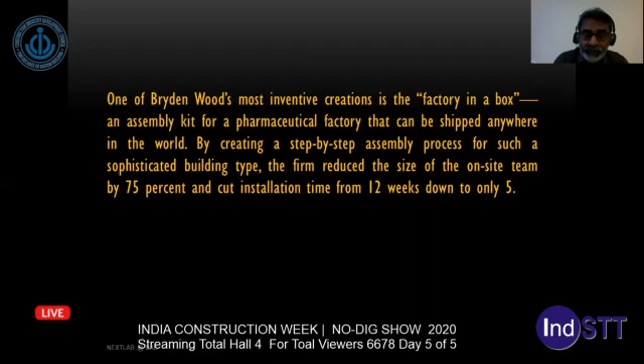Bryden Wood, one of UK's famous architects, created an inventive factory in a box, an assembly kit for a complex pharmaceutical factory, by creating a step-by-step assembly process. The firm reduced the size of the labor at the site by about 75% and the time consumed for construction by about 50%. So what we're trying to say is every company today has to think like a technology company and then look at the different verticals it seeks to disrupt.

So what is an intelligent building system, and how can we apply that to a practical real case? This is what NEXTlab @ BAE explores in this particular presentation.

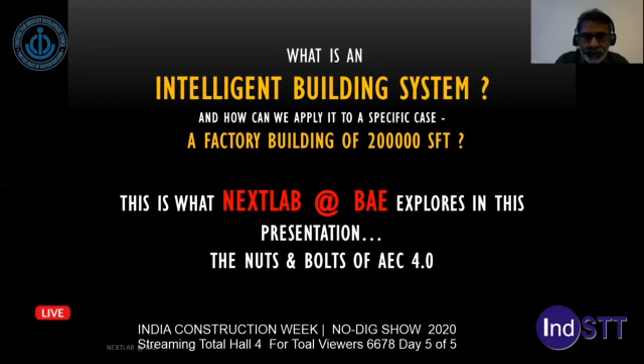An intelligent building system, by definition, is one that helps construction companies save resources, increase productivity, and improve project profitability and quality, while reducing project duration and cost, reducing the complexity of project management, and enhancing overall site safety for promoting sustainable development.

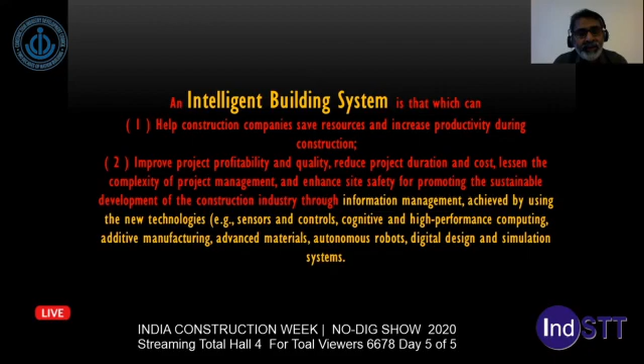NEXTlab @ BAE looks at IBS, or Intelligent Building System, from a multi-pronged perspective. The first is to create a strategic view based on a forecast of digital-driven value chain transformation or disruption.

The second is an operational view, as to how to decompose the strategic view into a pattern that can be applied across verticals. A technology view, in which case we assess the different technologies that are available.

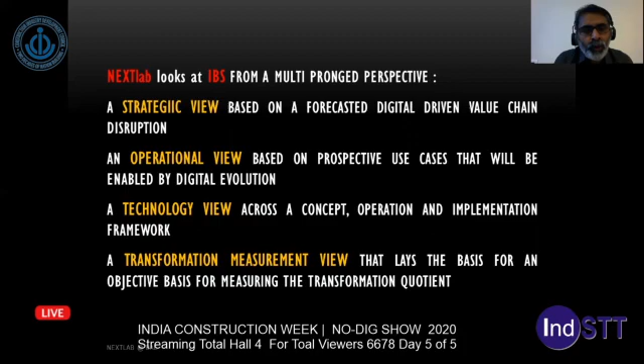The frameworks of technology and networking make it possible for us to convert the operational view, through the technology, into an intelligent building system, and a transformation measurement view that lays the objective basis for measuring the transformation quotient. Let's see the different views.

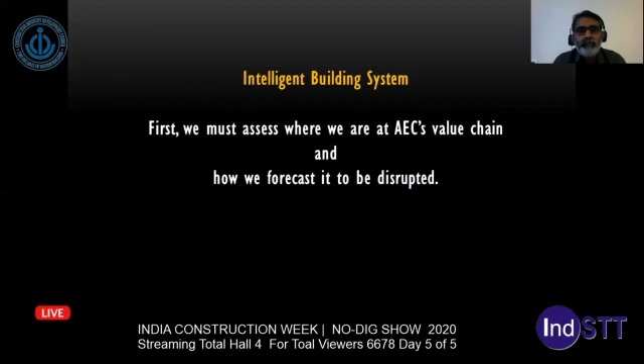First, we take a look at the strategic view. Let's take a look at the value chain of a conventional or an evolved value chain pattern in our industry.

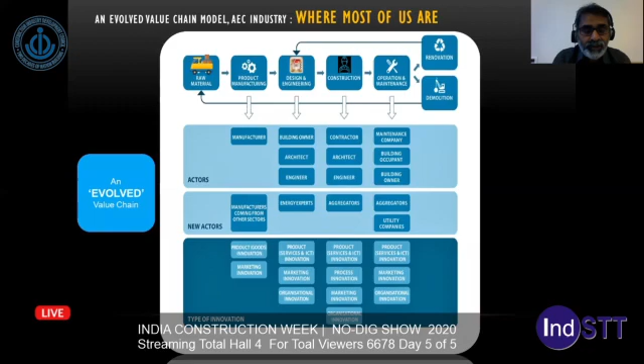From the raw materials to renovation to demolition, back to raw materials across manufacturing, design, engineering, construction, and operations, there are several stakeholders currently, with new stakeholders coming into the mix through different types of innovation. So this is how an evolved value chain currently, as most of us know it, exists.

Now, each link in this value chain that you've seen is set to undergo drastic reformation based on the digital disruptions. Let's take a look at the raw materials, the basic building blocks.

From conventional cement, sand, aggregate, reinforcement, bricks, blocks, etc., it goes through industrialization to become prefabricated RCC components like columns, beams, etc., prefabricated homes, bath pods, pre-engineered building systems, factory in a box, which you've already seen. Thereafter, through industrialization, Industry 4.0, or digitalization, it becomes converted to smart construction objects and intelligent building systems, and reformed materials or innovative materials like 3D printing solutions.

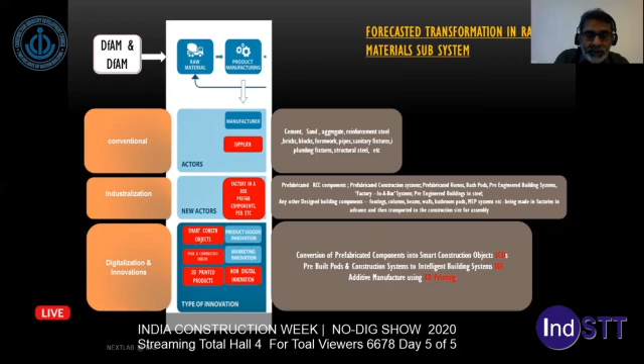So this is how the raw materials link in the value chain has transformed, or will be transforming, due to the digital disruption. With almost all the verticals getting consumed by Industry 4.0 or the digital revolution, sooner or later, this is where we are headed.

The value chain transformation in our industry would look something like this, where you can see the areas highlighted in red are the different technologies that are going to disrupt the different links in the value chain.

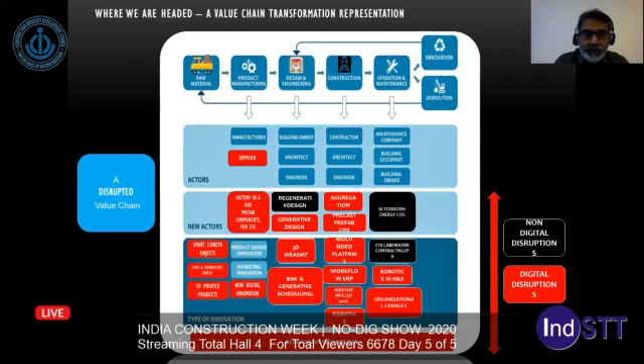And therefore, we are in the near future headed to AEC 4.0 location like this, where we have prefabrication, modular construction that will be rampant, advanced building materials, 3D printing, additive manufacturing, autonomous construction, augmented and virtual reality, big data, predictive analytics, wireless monitoring, cloud and real-time collaboration, 3D scanning and photogrammetry, and building information modeling.

So these are some of the technologies which will drive the use cases for the digital transformation of Industry 4.0 in our industry.

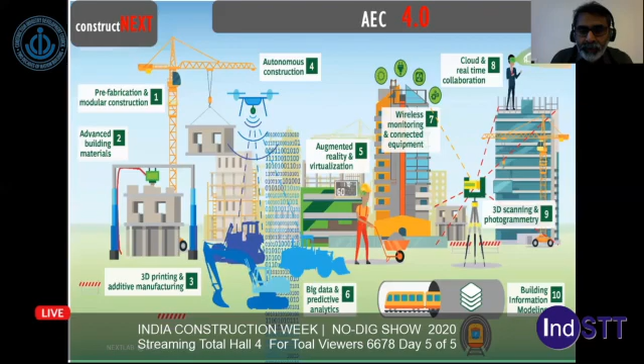So everything that you saw in the previous slide is a thing as defined in the Internet of Things. Let's take a look at the operational view based on a forecasted suite of use cases.

IBS is a product of an end-to-end digital transformation initiative across a company's or an industry's standard operating process. A company often asks the question: what needs to be, or can be, digitally transformed?

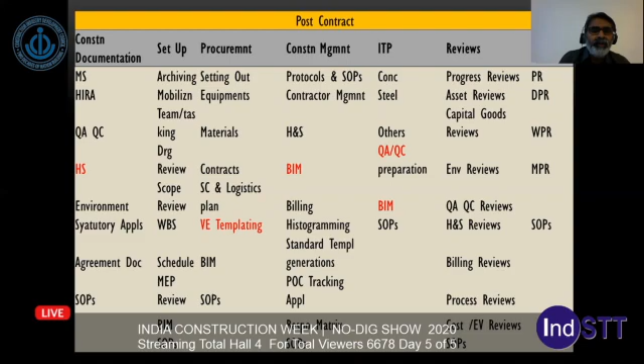For example, a suite of activities in a typical post-contract repository would look like this, across construction documentation or setup, procurement, construction management, inspection test plan, reviews, reports, etc. These have got several activities or tasks associated in a post-contract ecosystem.

Now the IPS's operating view examines a suite of activities, which we've shown before, and identifies an aligned suite of technology and other solutions to aid the transformation of each activity or operation and establish a collective automated operational protocol for it. That is the operating view.

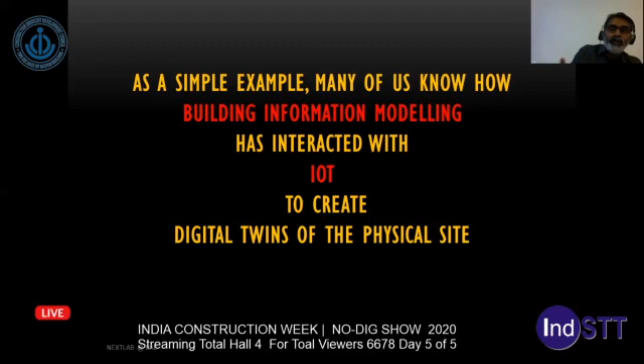As a simple example, let's take a look at the combination of building information modeling and IoT, which creates a digital twin on a BIM platform. NextLab is a multi-sided platform, and we work with aggregated digital expertise in the quest of a converged whole. Virtual Win is one of our associates in the realm of building information modeling. Let's take a look at how BIM is transforming the industry.

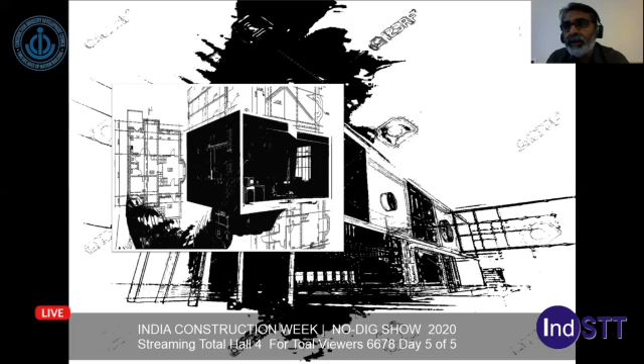It's not a disruption anymore because it already exists, but combined with IoT, which is a serious disruption, BIM creates a digital twin and makes it possible for us to plan and schedule using the platform, creating a baseline versus actual scenario in real-time monitoring of the project.

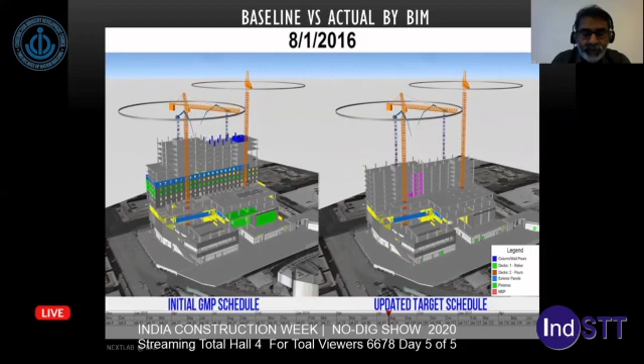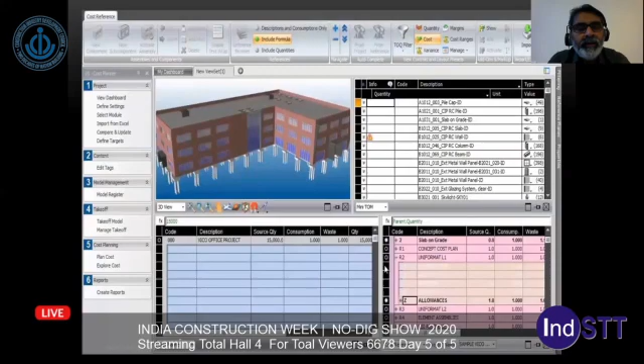It creates a cost estimation analysis and asset management schedule with its 5D capabilities. The sixth dimension of BIM makes it possible for us to create energy analytics to aid sustainable energy consumption.

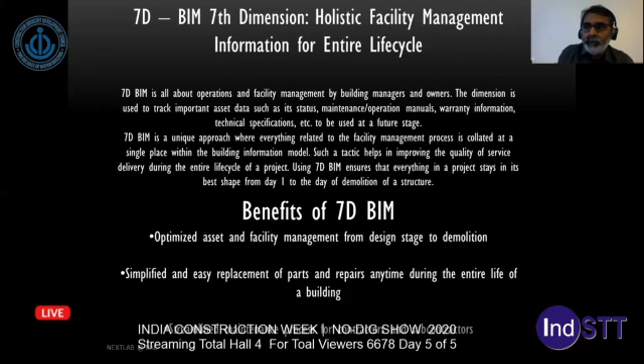And 7D, which is probably one of the most important aspects of BIM, contributes to the operational and facility management well-being of the structure after construction is over, by having a complete set of data retrieved straight away from the construction site as it happens through IoT technology and sensors, transmitting the data back to the BIM platform in the studio and creating a virtual or digital twin in the process.

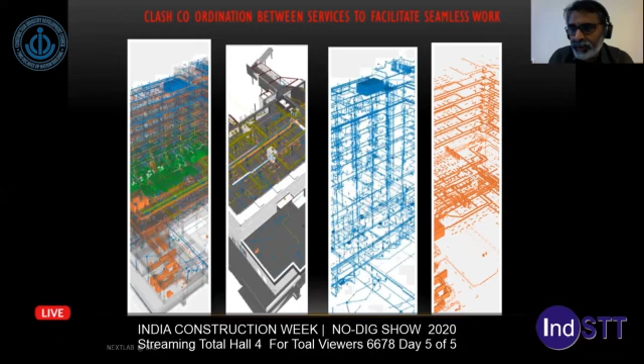So it also helps us achieve clash coordination between the services, which is a very important part in ensuring easy project management and construction supervision.

Further, we also do research on specific trends occurring all over the world and specifically in our country, identifying practical use cases across the technology spectrum.

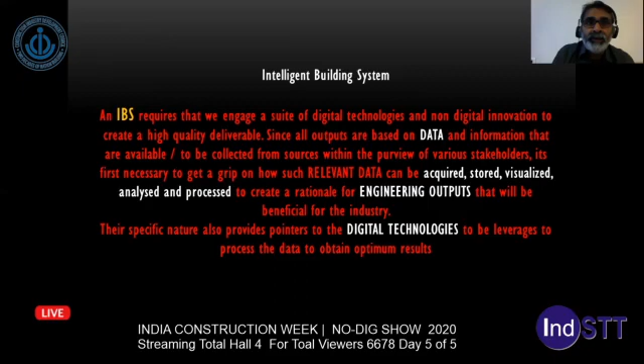In IBS, it's required that we engage in a suite of digital technologies. Based on those technologies, we collect data which we acquire, store, visualize, and analyze to create a rationale for engineering outputs of products, which is the ultimate intent of using digital technology for the betterment of our industry. So let's take a look at this combination of technologies available and the different use cases.

With which it integrates over a network to create rampant changes or disruptions. The rate of change is far removed from what used to happen in the past. It's not linear anymore, it's exponential.

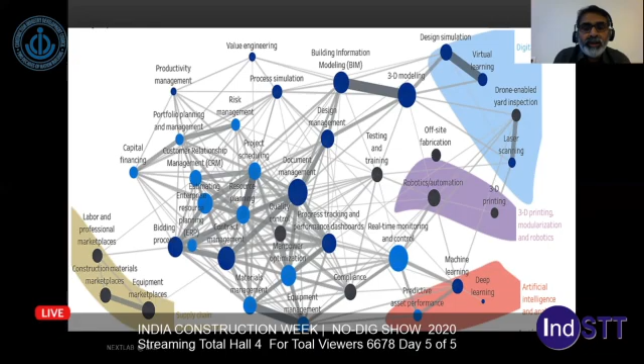So a complex web of use cases and technologies are shown here, meaning investors are looking to make investments in technologies such as ERPs and other serious digital disruptors, particularly predictive analytics, big data, IoT, and drones.

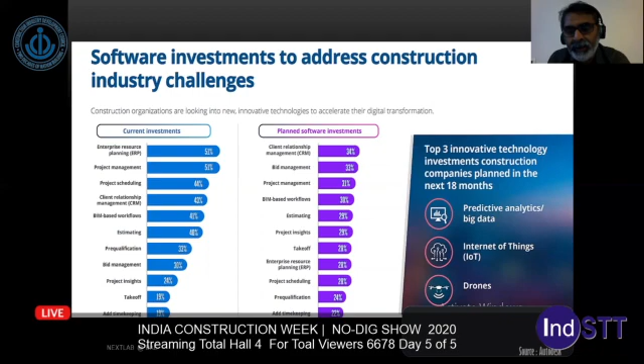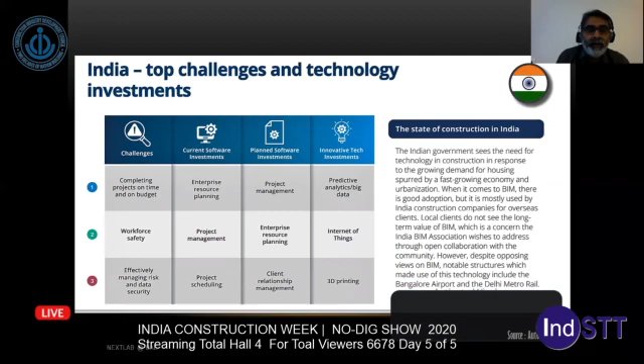Particularly as far as India is concerned, given its special nature of challenges, software investments are currently hinging around ERPs and project management and scheduling softwares. However, the time is not far when we combine all the other technologies to create converged platforms using a combination of technologies to deliver optimum quality outputs or deliverables to the industry.

Let's take a look at the technology view, how this technology is employed in different frameworks. There are three different frameworks we are creating. Firstly, we develop a conceptual framework of the intelligent building system. Then we analyze the operating mechanism of the IBS.

Then we look at the implementation part of the IBS. In all of this, we take a technology view and not the strategic or operational view of the platform itself.

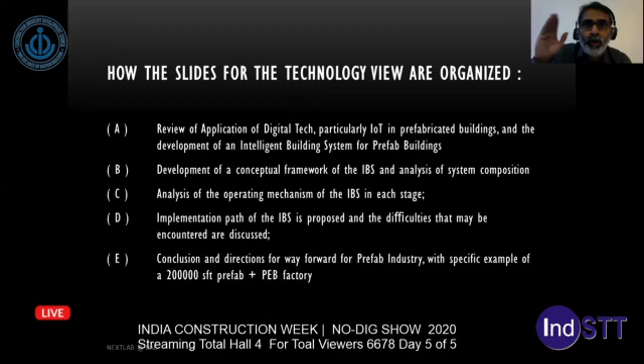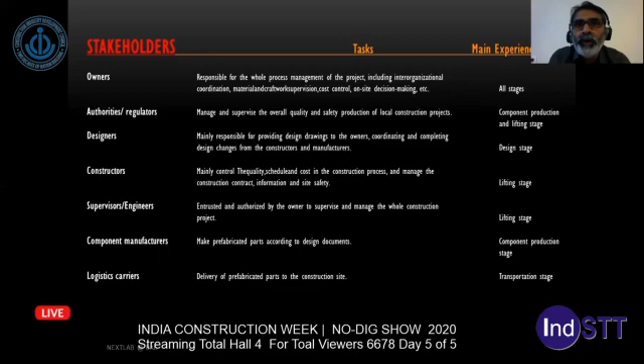First, looking at the stakeholders, we have the owners, regulators, designers, constructors and contractors, engineers, component manufacturers, and logistics carriers, each with a specific set of responsibilities and each within a particular zone experiencing the changes due to the transformation. So what digital technologies are to be employed?

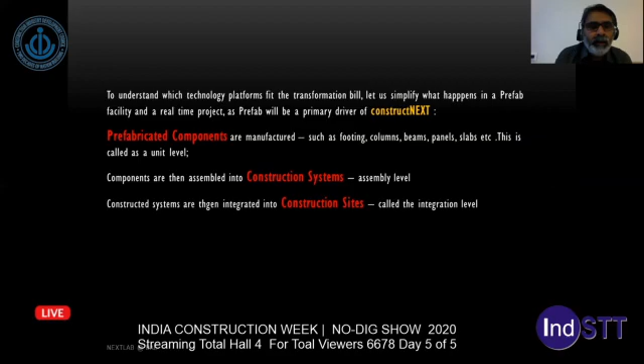To understand this better, we have to divide the prefabricated building, which is the use case we are taking, into three different levels: a unit level, assembly level, and the integration level, which is the component level or construction system level, and the construction site level, respectively.

At the prefabricated component level, we identify, locate, and track prefabricated components through the connectivity of IoT to realize visualization and traceability of the component information.

At the system level, or construction system level, again in the factory environment, we plan and optimize the construction process through real-time collection, integration, and interaction of the construction production process.

And at the site level, where the components and construction systems are assembled, we realize intelligent management, control, and optimization of the construction process for smart construction.

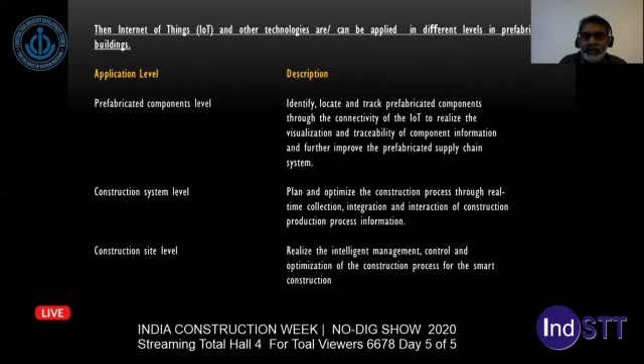At the level of the components, we use IoT, RFID, and GPS to achieve our objectives. At the construction system level, you use a combination of IoT and a BIM platform to interchange and transact data and information. And at a construction site level, we use the technologies of internet, 3D scanning, BIM, virtual reality, augmented reality, and IoT, AR, VR, etc.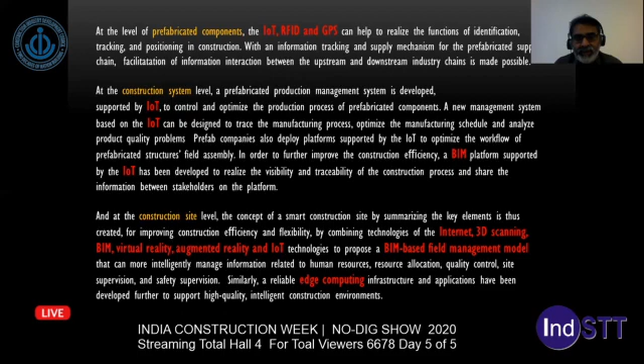We propose a BIM-based field management model that can intelligently manage information related to HR, resource allocation, QA, QC, site supervision, health and safety, etc. So we've seen these are the different technologies like IoT, GPS, RFID, BIM platform, internet, 3D scanning, etc. These are at the core of prefab digitalization.

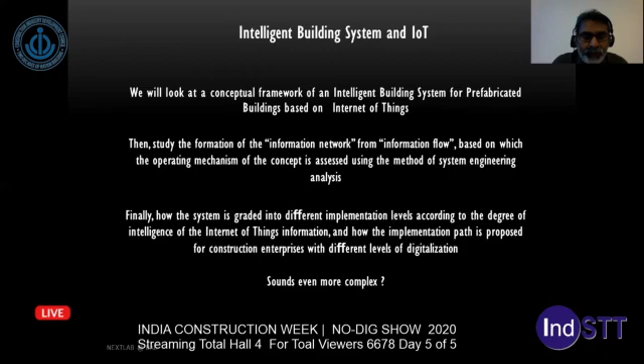We will look at the three frameworks that we talked about. For looking at the framework in detail, as data is king in almost all things digital, we have to create different sources or blocks of data, which will then, over a network, flow information across to and from, and be responsible for creating the interpretation and thereafter creating the product that we're after.

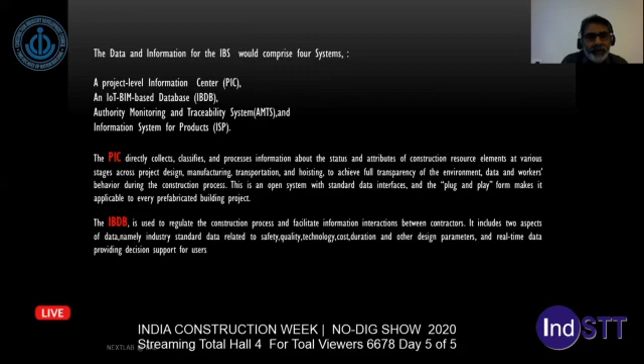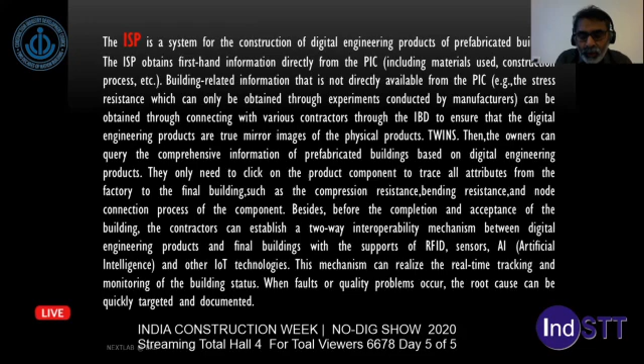So there are four primary blocks when it comes to a prefabricated building. You have PIC, which is a project level information block, IBDB, which is the IoT BIM-based database block. Then we have AMTS, which is the authority regulatory block. And we have ISP, a system for the construction of digital engineering products, which takes cognizance of all the data and information, analyzes, acquires, interprets, visualizes, and creates the products that we are after.

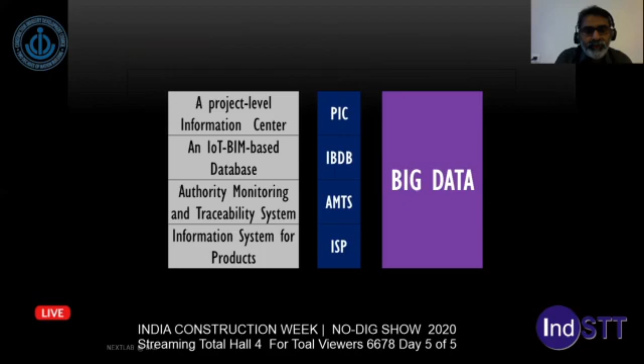So to sum up, the big data acquisition is the function of these four blocks: PIC, IBDB, AMTS, and ISP — a project level information center, IoT-based BIM-based database, authority monitoring and traceability system, and information system for products. This also integrates further with several systems and subsystems of the manufacturers, the designers, the contractors, logistics operators, etc.

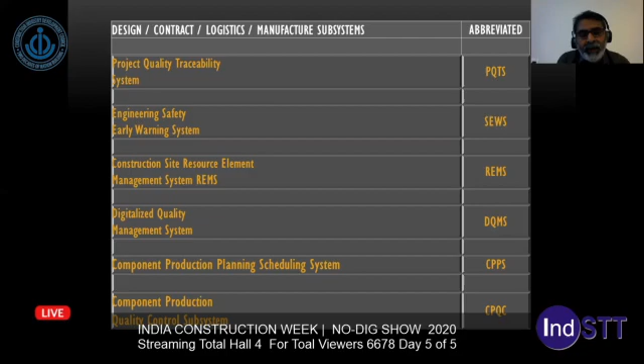So each of these contractors would have their own systems and subsystems, like the project quality traceability system of a manufacturer, or a construction site resource element management system of a contractor, or a component production planning scheduling system in the prefabricating factory, or a component transportation and dispatch system, CTDS, of a logistics operator, or an integrated design system, IDS, of a design consultant.

So with all these different blocks of data combining with the blocks of data of the manufacturers and their subsystems, we create a conceptual view where we highlight the main objectives of the authorities, contractors, and owners — supervision and control, lean construction, maximizing benefits, quality traceability, etc. — and how they combine with the subsystems of the manufacturers, interact, transact information between those systems and subsystems, and through the network of RFIDs, Wi-Fi, Bluetooth, and what have you, interact with the construction site to deliver a solution across resources, components, equipment, systems, men, and things.

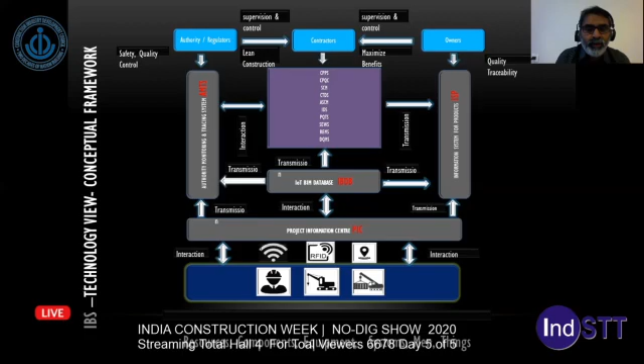So this is the technology view, the operating framework of the technology view. And how do we implement this concept and the operating framework?

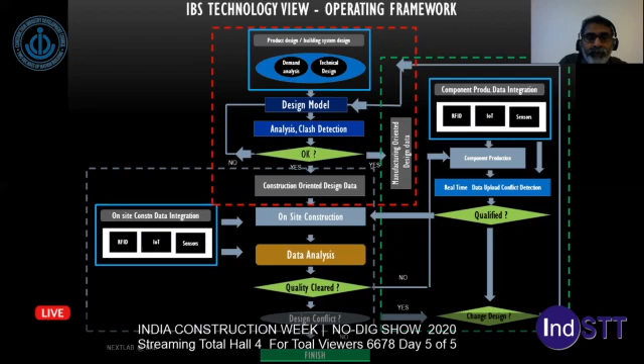It is done through a simple 10-step process where we build the smart construction objects. As we've seen earlier, the construction objects that are created from the prefabricated components — we build them first, establish a data acquisition system, collect data from SCOs through the data acquisition system, establish a network integration system, connect these SCOs through the integration system, and establish an information integration system.

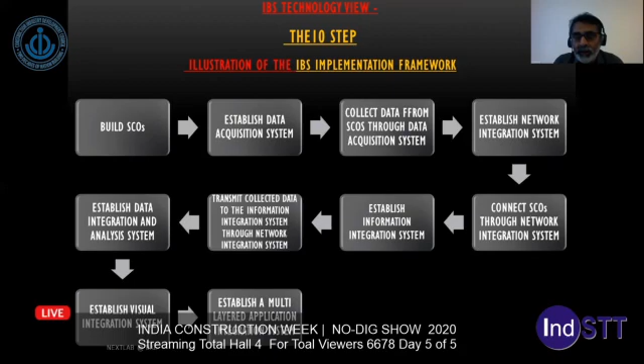The data information is created from the data, transmitted to the information integration system, and establishes a data and integration and analysis system. We analyze through a visual integration system and establish a multi-layered application integration system, which results in creation of your application of the product through the ISP.

So that's the technology view, we've taken the operating view earlier, and we've taken a look at the strategic overall wide canvas view, which brings us to the transformation measurement view for IBS.

We have used information and research from various big five consultancies like BCG, McKinsey Global, and we're inspired by the balanced scorecard approach to strategy implementation by Kaplan and Norton.

Although we are a work in progress for creating the digital transformation value chain transformation scorecard, BCG has set out a paradigm requirement for creating this digital transformation: an integrated strategy with a clear transformation goal, leadership committed to the goals, deploying high caliber talent, agile governance system, effective monitoring by lining out milestones, and a business-led modular technology. This is one of the approaches of BCG.

Similarly, we look at other big five consultants, and we can see how we go about creating a value chain transformation scorecard, which is the implementation measurement of the IBS strategy for a prefabricated building.

The same can be done across different types of buildings. So what are the different 10 platforms? We look at a prefab modular construction platform, advanced materials platform, design digitalization platform, BIM platform, autonomous construction platform, big data platform, wireless monitoring platform, cloud and real-time collaboration platform, 3D scanning, and a blockchain platform.

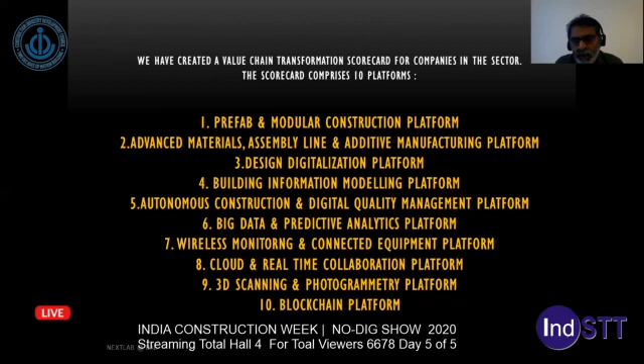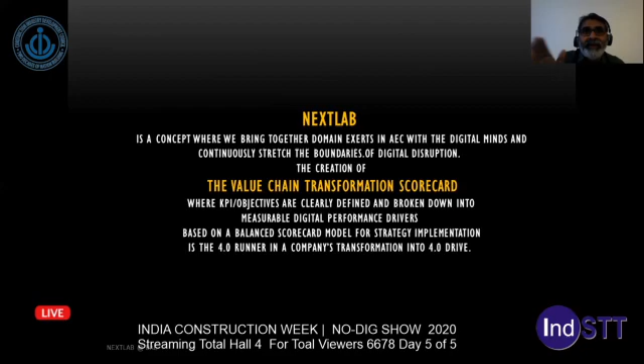At NextLab, we are a multi-sided platform, an MSP, where we bring all the digital talents together. We have established clear KPIs and objectives across the different value functions in a company or a vertical for the value chain transformation, and then identify the different measures - the lag measures or outcome measures - and the performance drivers necessary to create the digital transformation across these different platforms, which can be measured for the efficacy of the implementation.

So a few of the scorecard templates we can show here. We have not gone into the details of the outcome measures and the performance measures and the actual status, etc., because these are all specific to the nuances of how the company operates.

So if you see in the prefab or modular construction platform, you have clearly mentioned objectives which lead to the KPIs - production optimization, quality control. All these measures created here will be a function of these objectives and the use cases we mentioned earlier, defining different use cases across the different departments in the company.

In a post-contract environment, you've got construction management, setting up, mobilization, etc. So defining the key objectives - and I've given a description of some of these - defining the measures here, what needs to be the outcome measure, and to achieve that outcome measure, what needs to be a performance driver to ensure we get production optimization by creating these systems, using technologies like IoT, RFID, GPS, BIM, etc.

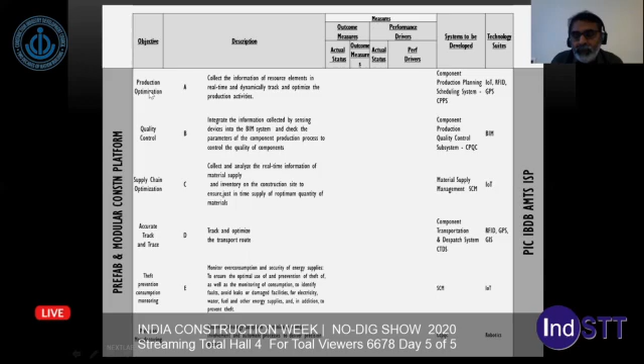So the different technologies necessary to be employed for us to implement these systems, by which we can make a paradigm change in the way companies and their different departments operate. Here is a scorecard, a kind of template of a scorecard for a prefab and modular construction platform.

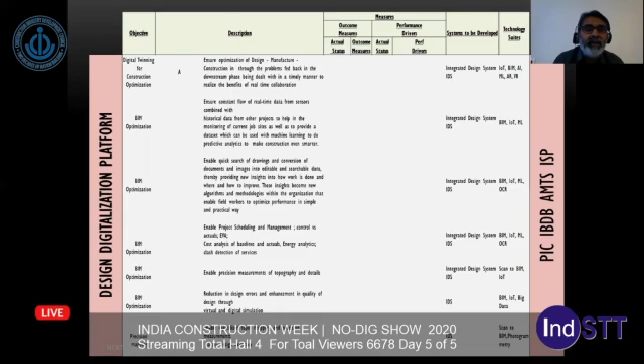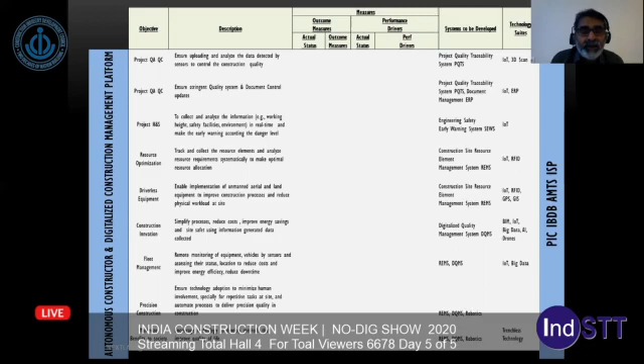We've shown you the design digitalization platform here. This is different from a BIM platform because BIM is a complete different area in itself. So these are some of the scorecards or KPIs for the design digitalization and autonomous construction platform. Again, the technologies in play here are also illustrated - big data, predictive analytics platform, etc.

So for digital transformation, we are currently doing a project in South India, a 2 lakh square feet project for a German principal who manufactures generators for windmills. The digital transformation approach, using these different views - the operating view, the strategic view, the technology view, and this particular digital transformation measurement view - is being implemented. It's a work in progress, being done using a 10-step IBS framework and a 10 platform IBS strategy.